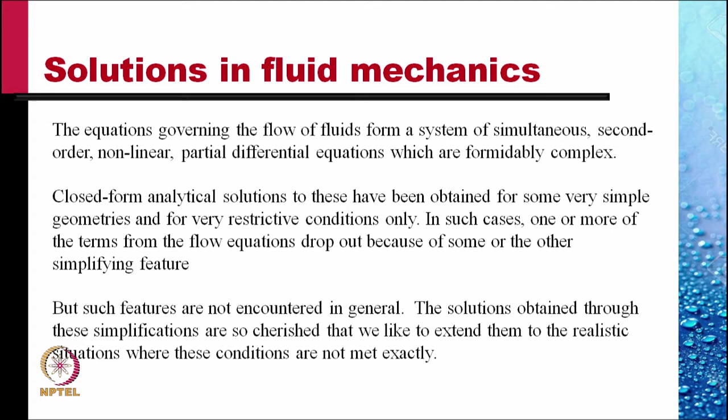The solutions obtained through these simplifications are so cherished that we like to extend them to the realistic situation where these conditions are not met exactly. And so we have to resort to approximations.

If we were predicting the global weather using thousands of equations on a supercomputer and someone suggested that we are making a mistake by not including the effect of the flapping of the wings of a distant butterfly several weeks earlier, we would simply have laughed it off.

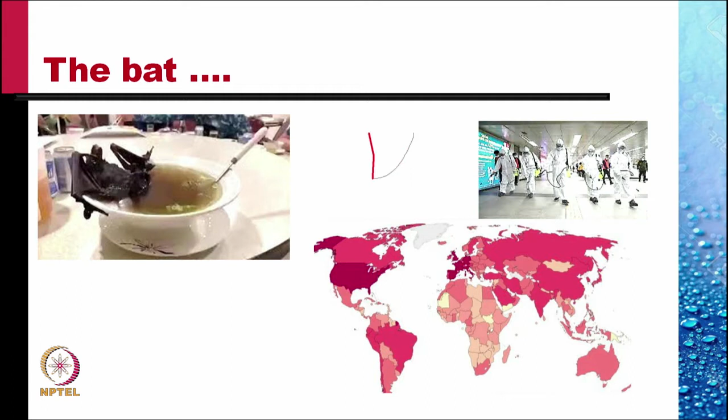But consider that in December 2019, a gentleman in the city of Wuhan took some bat soup, and soon there were repercussions which were beyond imagination. The whole world got infected with the COVID-19 virus. Up till now, 90 million people have been infected, 2 million have died. The medical facilities are under severe stress. The cities have been locked out. The schools and colleges shut down, and the economy is shattered.

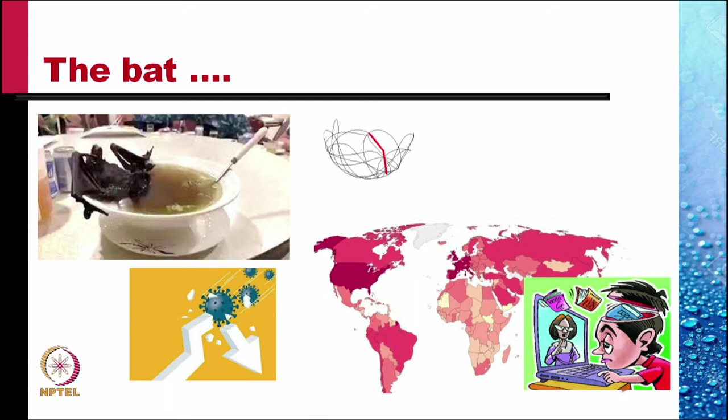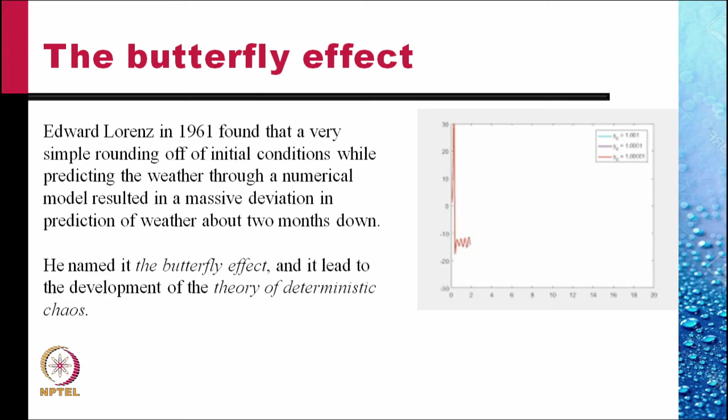But still, the practice of engineering proceeds on the principle that small causes produce small effects. So if we can show that a cause is small, the expected results are small, and so we can neglect that small cause. And we shall persist with this principle till something goes wrong and we'll have to reconsider.

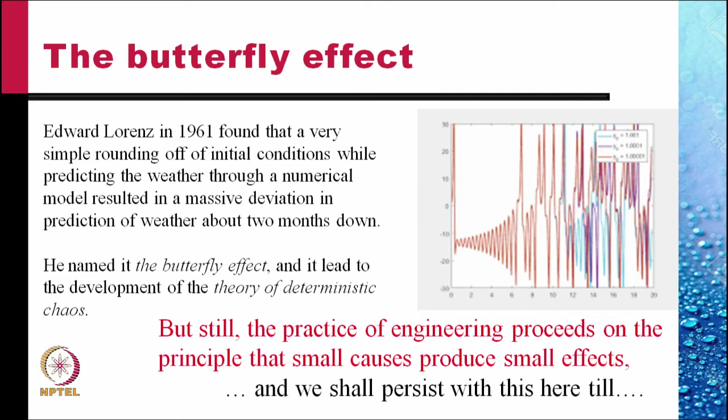So we need to determine which terms in the governing equations are negligible, and for this we need to estimate the magnitude of various terms, so that we can neglect terms which are small in magnitude compared to terms which are larger in magnitude.

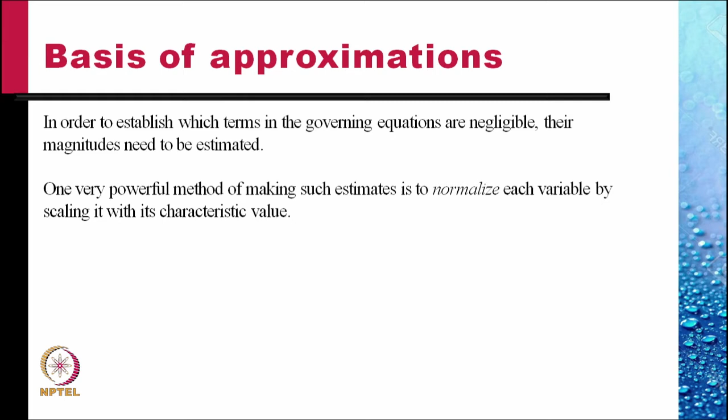One very powerful method of making such estimate is to normalize each variable by scaling it with its characteristic value. If the characterizing values of the quantities are chosen properly, the normalized variables are then expected to be of order unity. That is, except at certain isolated points in the flow field, the values of the transformed variables are expected to be neither very large nor very small compared to unity. Further, it is hoped that not only the variables but the dimensionless derivatives of the various physical quantities appearing in the equations are also of order unity.

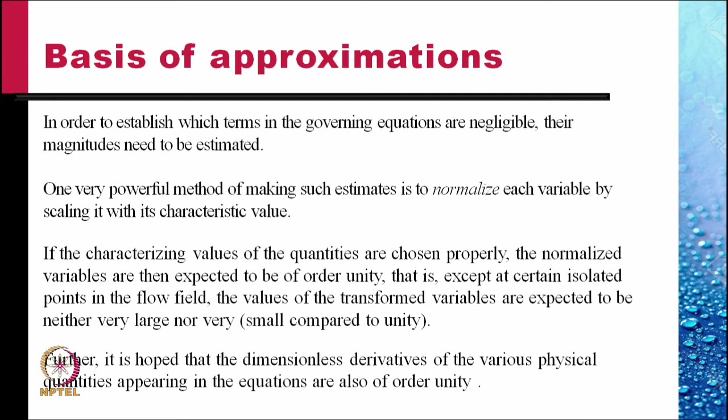Let us consider the flow past a circular cylinder of diameter d. A fluid at a faraway pressure P naught and a faraway velocity which is pulsating like V naught sine t over tau flows past the cylinder. Following the procedure discussed earlier, we can normalize the various variables.

X star is equal to x by d, z star is equal to z by d, t star is equal to t by characteristic time, and the time period of pulsation tau could be a characteristic time. U star, the velocity in the x direction, is u divided by V naught, the amplitude of the free stream velocity, and W star is equal to W divided by V naught. We could non-dimensionalize pressures as P star is equal to P by P naught, the standard procedure.

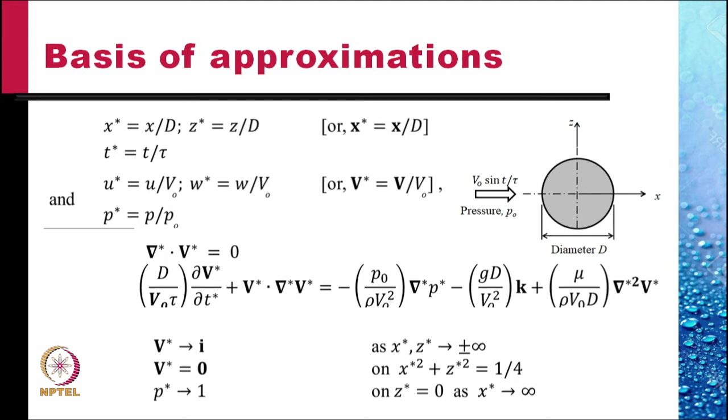The coefficients of the various terms, which are nothing but non-dimensional groups of various parameters, form the pi numbers as we have discussed a few classes ago. The various pi numbers like Strouhal number, Reynolds number, Froude number, Euler number, Weber number, Cauchy number, Strouhal number again for centrifugal forces.

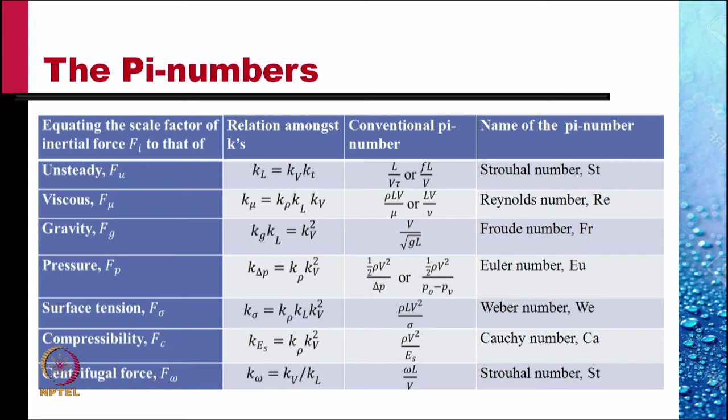So in this equation, the first term is the unsteady term, the second is the convective acceleration, and we have rendered the coefficient of this as unity. The first term on the right is the pressure term, the second the gravity, and the third the viscous term. Since the coefficient of the convective acceleration term is 1, the coefficients of the various other terms measure the relative magnitude of those quantities with respect to the convective acceleration.

We recognize d by V naught tau as the Strouhal number, and this we clearly see as the ratio of unsteady forces to the total forces, the convective inertial forces. The second coefficient, P naught by rho V naught square, is recognized as 1 over Euler number, and would be the ratio of the pressure forces and the inertial forces.

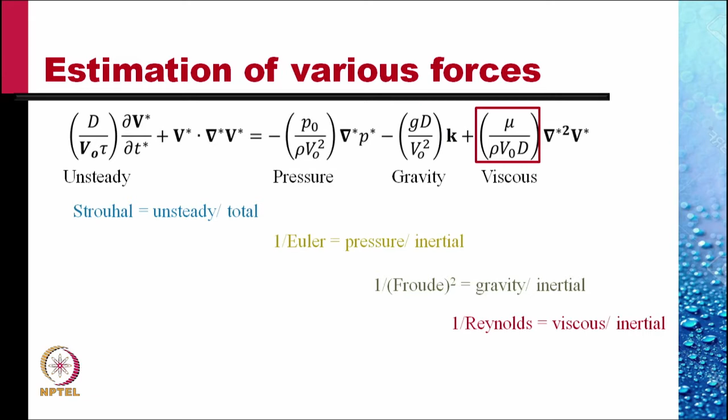The third term is recognized as 1 over Froude number squared, because Froude number is V naught divided by under root g d. And this is the ratio of gravity over the inertial forces. The coefficient of the last term is 1 over Reynolds number, which is the ratio of the typical viscous over inertial forces.

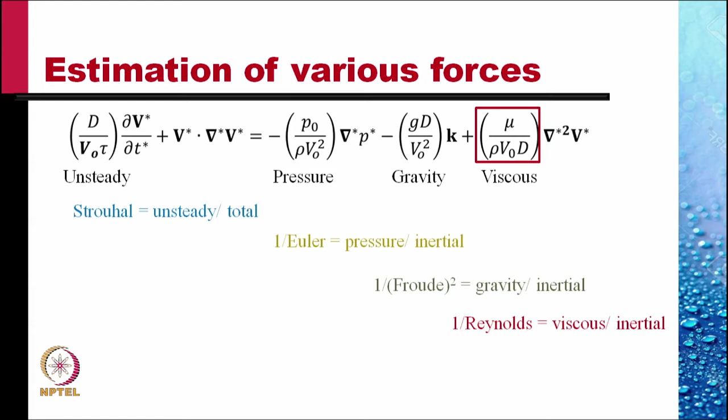So clearly the magnitudes of these coefficients tell us something about the importance of these terms in this equation. If any of these coefficients is much less than 1, then the term is negligible compared to the convective acceleration term.

Let's do an example of carrying out this analysis, and this is concerned with spreading of oil slick when there's oil spill in oceans. The spreading of oil slick on seawater is controlled primarily by the viscous forces that the seawater applies on the slick, the unsteady inertial forces, and the buoyant weight of the slick. That is, the weight of the slick minus the buoyancy force. The surface tension forces are unimportant in the initial period of the oil spill and come into play much later.

Can we estimate the time that it takes for the surface tension forces to come into play? Clearly, the approach would be to estimate the surface tension forces and see if it contains any time parameter. Then as long as the coefficient of the surface tension force in the non-dimensional equation, that is an estimate of surface tension force with respect to the inertial forces, is much less than 1, then the surface tension forces are negligible. But they would come into play when that coefficient approaches the value 1.

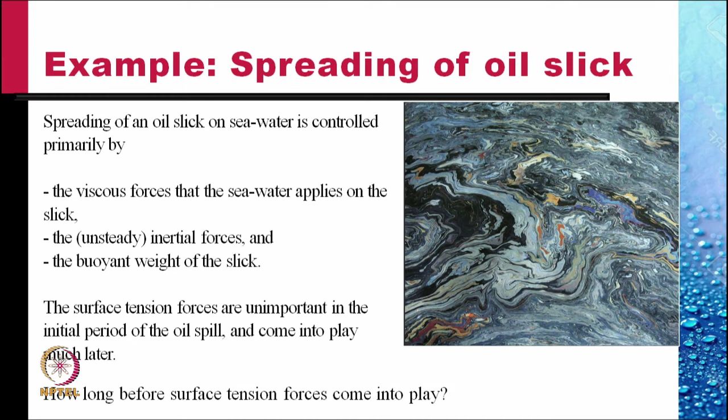So we estimate these forces. The surface tension forces are estimated as sigma times Lc, where Lc is a characteristic length and sigma is the surface tension between the spilled oil and the seawater. This is the force which tends to stretch the slick wider. The unsteady inertial forces in the slick which oppose that stretching are estimated as before. Inertial forces would be the characteristic mass multiplied by characteristic acceleration dV by dt, and the mass is estimated as the rho of the slick times the characteristic length cube, that is like the volume,

multiplied by the unsteady acceleration, which would be like Vc by Tc. And so this is an estimate of the inertial forces. So surface tension forces are negligible as long as this over this is small compared to 1, which is here. This contains Tc, and as the time increases, this parameter increases.

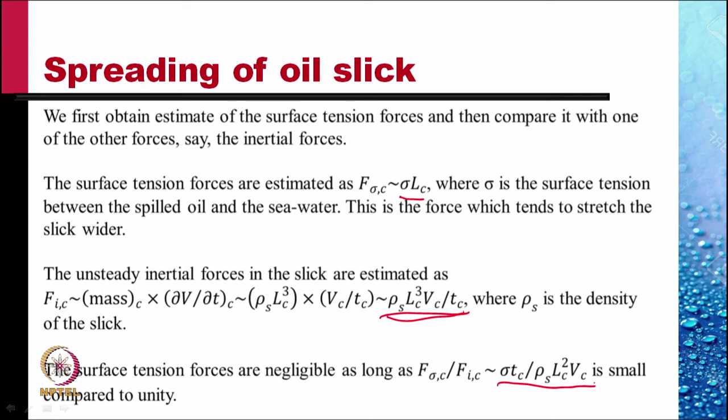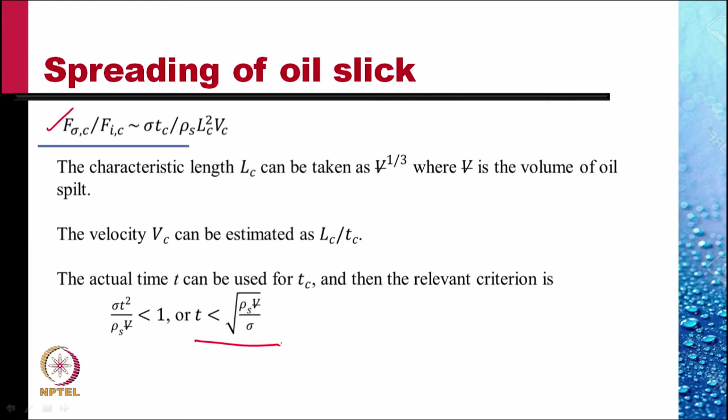Let's estimate for what time this would become of order 1. That is the ratio that we obtained. The characteristic length Lc can be taken as the cube root of the volume of the oil that is spilled. The velocity Vc can be estimated as Lc by Tc. The actual time t can be used for the characteristic time, and the relevant criterion then is that this is negligible as long as t is less than under root rho of the slick times the volume of the oil divided by the surface tension between the oil and the seawater. So the surface tension does not come into play for t less than under root rho s V divided by sigma. For typical values of rho s and V, this may yield a period of several days during which surface tension force is not significant.

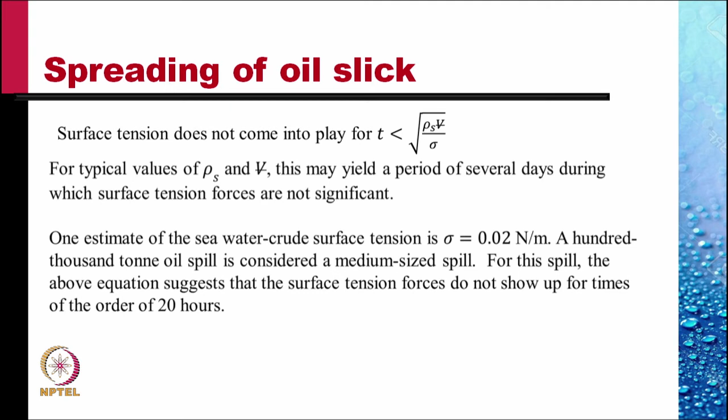One estimate of seawater crude surface tension is 0.02 Newton per meter. Take a 100,000 ton oil spill, which is considered a medium size spill. The above equation suggests that the surface tension forces do not show up for times of the order of 20 hours. So for the initial 20 hours, the surface tension forces can be neglected. And it's only after that the surface tension spreads the oil on water.

Let us illustrate these concepts further by taking a problem in which a fluid is confined between two plates. The upper plate is stationary, but the lower plate is oscillating at a velocity of V naught sine omega t. The gap between the plates is B.

Let's estimate the forces. The unsteady forces, which are like mass times acceleration, would, using our usual procedure, result in an estimate of this, where the subscript C denotes that these are the characteristic quantities. The viscous forces are estimated as mu times the area times the velocity gradient, and as before, it comes out to be mu times LC times VC.

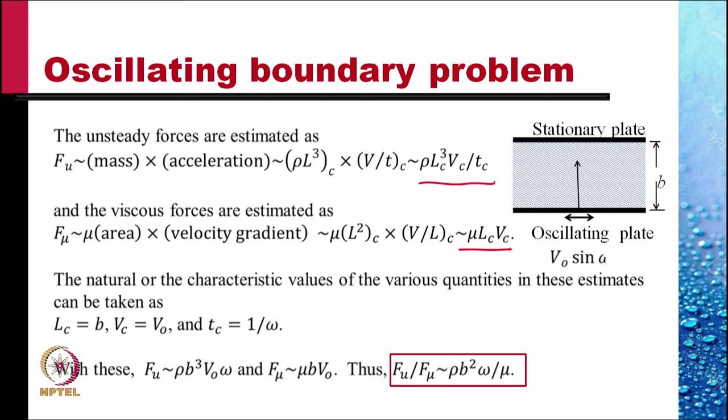The natural or the characteristic values of the various quantities are: LC can be taken equal to B, VC can be taken as equal to V naught, the amplitude of the velocity fluctuation, and the characteristic time can be taken as 1 over angular velocity. If we do this, the ratio of the unsteady forces to the viscous forces is estimated as rho b square omega by mu.

The ratio rho b square omega by mu then determines the relative importance of the two types of forces. If this value is small, that is, if omega is less than mu divided by rho b square, the unsteady effects are small and may be neglected in comparison with the viscous forces. Once the unsteady effects are neglected, the governing equation would require that the net viscous forces be 0 on this element, because the governing equation is a balance of unsteady forces plus the inertial forces equal to the pressure forces plus the viscous forces. Because of the geometry, the pressure forces are 0. Because the flow does not change in the x direction, the inertial forces are 0. So the governing equation just balances the unsteady forces with the viscous forces.

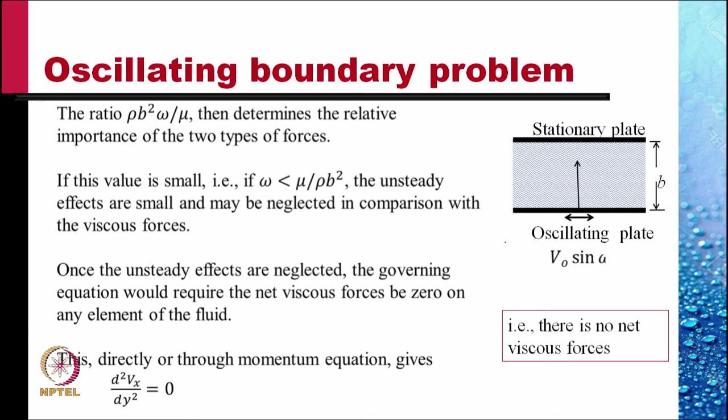And if the unsteady forces are 0, that means we can neglect the left hand side. Then the only term remaining in the equation would be the viscous term equal to 0. The net viscous force should be 0. Del square Vx by del y square is 0. This is the solution that we obtained for the Couette flow. There is no net viscous force. This equation is to be solved with Vx equal to V naught sine omega t at the lower plate and 0 at the upper plate.

For omega less than mu divided by rho b square, which is also nu divided by b square, where nu is the kinematic viscosity, the solution looks like this. The solution is a straight line, but the boundary condition at the plate changes with time, V naught sine omega t. That's why it's a straight line profile which is swinging between two extremes, minus V naught to plus V naught. At any instant, it is a straight line.

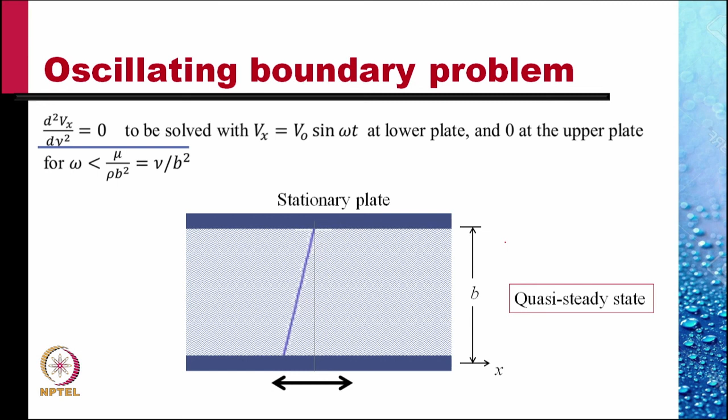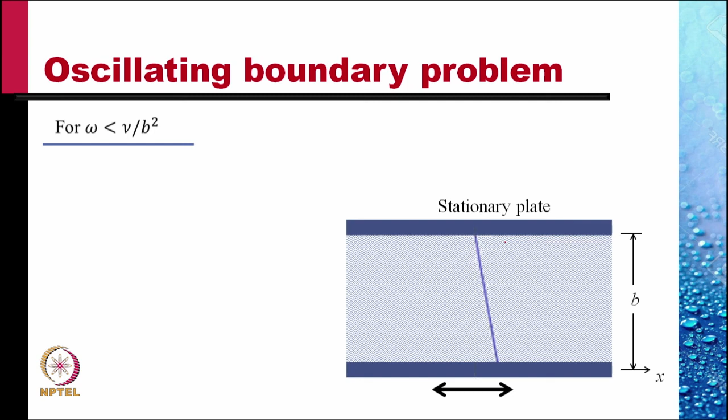This is a quasi-steady state solution. At any given moment, we can neglect the inertial forces within the fluid. We can treat the fluid to be steady at any moment and solve for the instantaneous boundary conditions. But those instantaneous boundary conditions are changing with time. They are changing slowly enough for this setup so that at any instant the profile is as if it is a steady flow with the instantaneous velocity of the lower plate as the velocity of the lower plate and 0 as the velocity of the upper plate. A very interesting solution. This is all for omega less than nu divided by b square. The rate of change of velocity is slow compared to nu divided by b square.

B square by nu, the reciprocal of that, can be named as the penetration time tau. This is the time it takes for the effect of the motion of the lower plate, or change in velocity of the lower plate, to penetrate up to the upper plate. More the viscosity, lesser is the penetration time. In a very viscous flow, the penetration is almost instantaneous. Now, if omega is much less than 1 over this penetration time, then at any instant the effect of the change of velocity of the lower plate penetrates almost instantaneously to the upper plate. And that's why we get a quasi-steady flow.

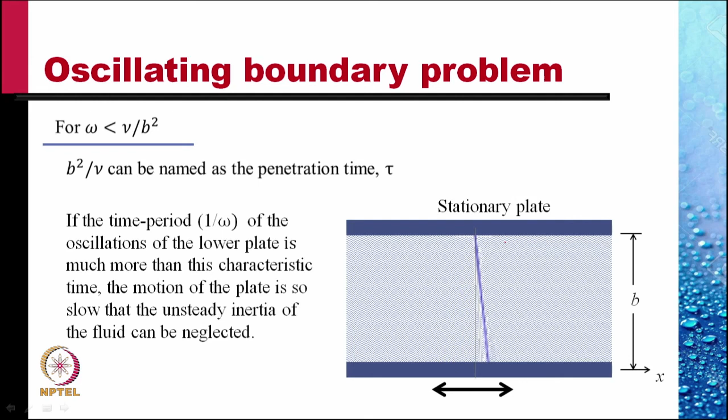If the time period 1 over omega of the oscillation of the lower plate is much more than the characteristic time, the motion of the plate is so slow that the unsteady inertia of the fluid can be neglected. This is what we showed in our discussion. Alternately, we can consider nu divided by omega. From this, we get b square equal to nu divided by omega, or b equal to under root nu by omega.

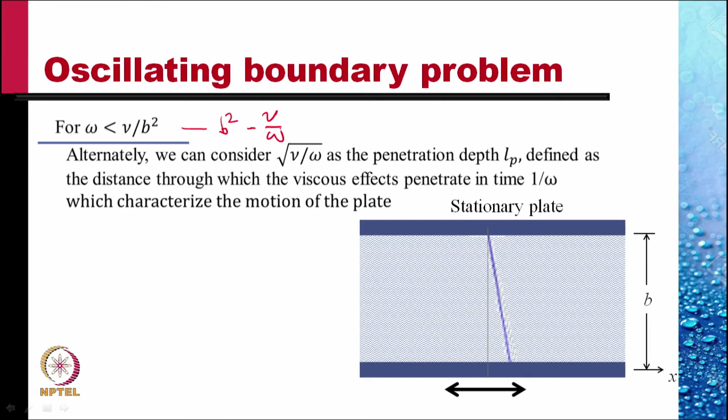We can consider under root nu by omega as the penetration depth LP, P for penetration, defined as the distance through which the viscous effects penetrate in time 1 over omega. 1 over omega is the time period of the fluctuation, or related to the time period of fluctuation, which characterizes the motion of the lower plate. Therefore, for b much less than under root nu by omega, or the gap between the plates less than the penetration depth, we can imagine that the effect of the motion of the plate penetrates throughout the thickness of the fluid layer before the motion of the lower plate changes direction, or that the oscillation appears too slow to the fluid and it can be assumed to respond instantaneously. Same thing we said in the last slide, repeated in different words.